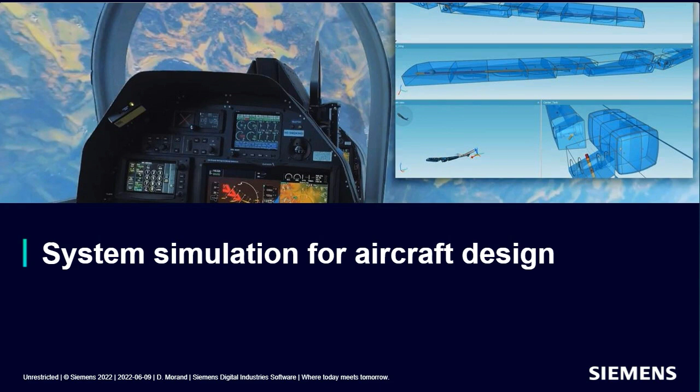Thank you, Caroline, and hello to everyone. It's a pleasure to present you today the use of system simulation for aircraft design. I will go during this 40-45 minutes presentation with Florian through the following agenda. We will look rapidly about the aircraft systems challenge from the aerospace industry, how systems performance

engineering with Simcenter addresses this challenge. We will look at typical applications available with our solutions, and especially we will make a focus, thanks to Florian, on the simulation of fuel system management in relation to severe flight dynamics conditions. I think it's a very interesting subject, and we will conclude these presentations. You can leave us some questions in the Q&A window. We will reply at the end of the presentation to your questions.

Going for industry challenges, like any other industry in the world, sustainability is a key word, and there is a need for any aircraft maker or supplier to actually reduce its CO2 emission consumption to address a better world. We have recently seen that last year a resolution was passed by IATA members to actually have a net zero carbon emission from their operations by 2050. So it's become really mandatory to address the ecological issues when developing new aircraft.

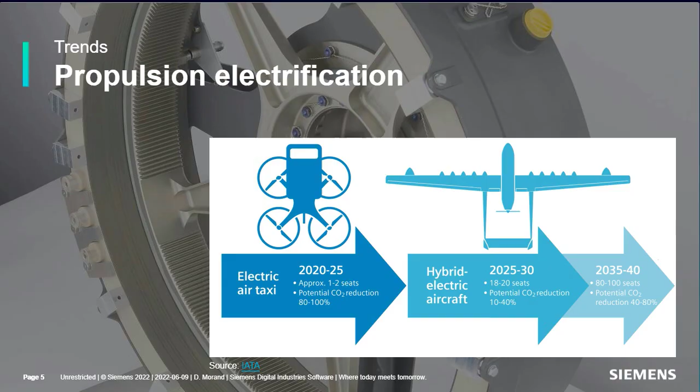We have also recently seen R&D and projects around H2 propulsion, and this leads actually to a complete rethinking of how our concept of aircraft can be developed. At the same time, configuration of aircraft has to be rethought, where various types of wing body can be evaluated, leading to looking at a new distribution of masses and flow elements into the aircraft.

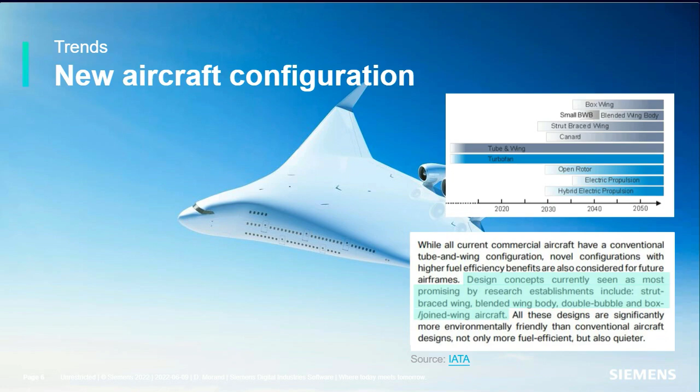So these trends actually affect design from conceptual design, preliminary design, and detailed design all along the process. Engineers have to deal with more complex products. Still, they have to reduce time to market and reduce risk, safety being very important, while actually working more and more in a seamless process and removing barriers between silos, teams, and disciplines. So simulation and engineering work can actually be a part of this challenge in order to enable rapid design to prototype work.

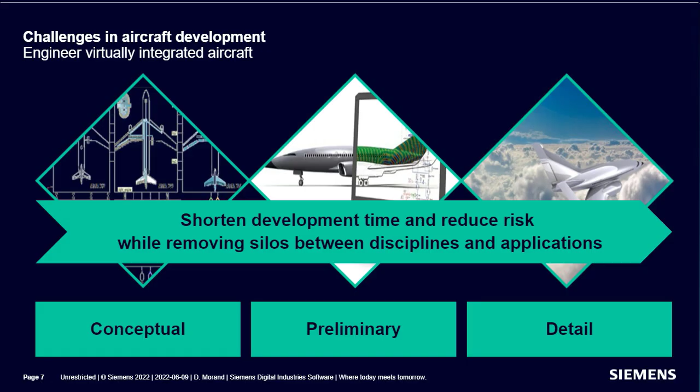If we look at a design process, where simulation can be used and what it means to use simulation all along the design process, from requirement down to launch of product. Actually, it means to work with requirements, to be able to co-simulate various tools, to be able to connect the physical world with the electronic and control world, with software in the loop or hardware in the loop, to be able to use complex models embedded in a virtual representation of an aircraft for verification and validation, in order to use simulation at every step of the process.

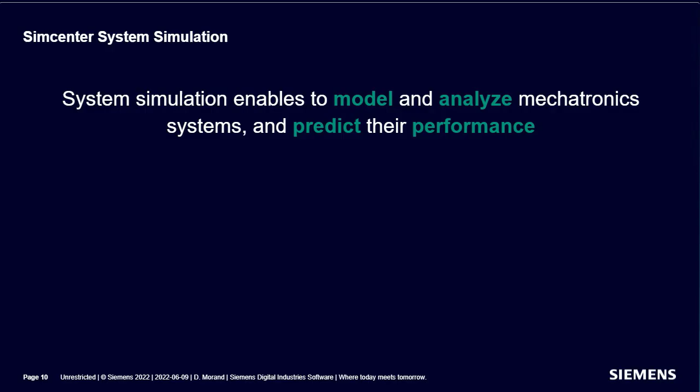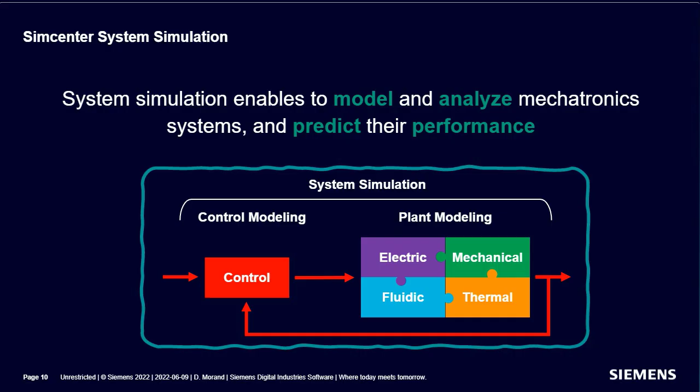I would like to see now how Simcenter system simulation addresses this challenge and how it can be used in such a process. A short recall about system simulation: it is actually a composition of two worlds, control modeling and plant modeling, where we simulate at steady state and dynamic points a complete system, smart systems, in order to predict its performance.

System simulation can be used at various steps of a design cycle, where it can be a first level, sufficient enough modeling level to address the first high level design requirement. It can also be used between high detail level and detailed design models, where usually we use lots of 3D CFD. System simulation can be either on the left side of the design cycle as a boundary condition for such a model, or it can also be a container for component testing and subsystem testing. They can embed results from CFD software or finite element software detailed design inside the model in order to simulate more rapidly a complete system at verification and validation phases.

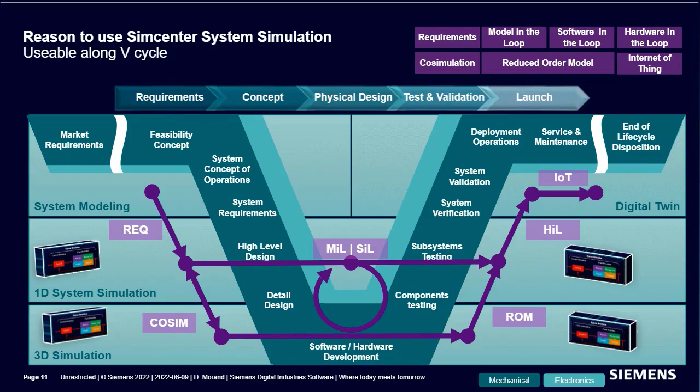So when we use system simulation all along this design, we use our tools, of course, but we also use a kind of methodology. Aerospace industry is one of the leaders of MBSE methodology. So we try with system simulation within Simcenter to have a virtual system integration point of view when we develop a model, with componentization of the elements, where each element can be packed into a component and reused in order to follow a breakdown structure of a complete aircraft and simulate the combination of various systems together, in order to, at pre-design stage, evaluate the behavior, but also at verification stage, evaluate safety procedures, and so on.

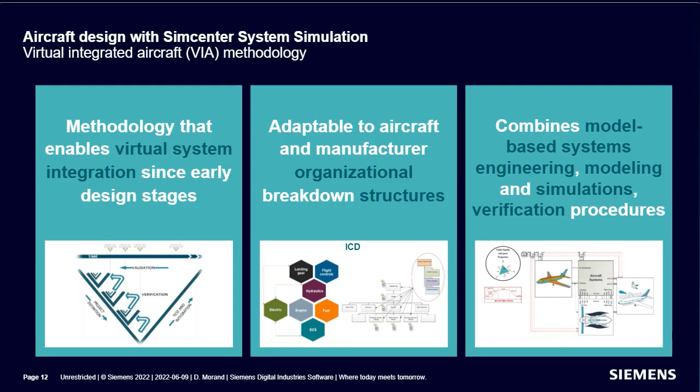I'll switch here. How does this really apply on the supply chain? System simulation can be used by some component makers. For example, if we took the example of a valve and pump builder, they can use this kind of model that reproduces the dynamic behavior of a given pump, which can be integrated virtually into a braking or steering system of a tier 2 supplier, which can itself be integrated into a more complex system of a landing gear, that at the end will be integrated into a virtual model of an aircraft, being able to simulate not only steady state but transient behavior and dangerous maneuvers, for example, of an aircraft. So system simulation, as we are used to in CAD or CAE models, can also be a link and can enable users on various supplier and customer sides to exchange models between each other.

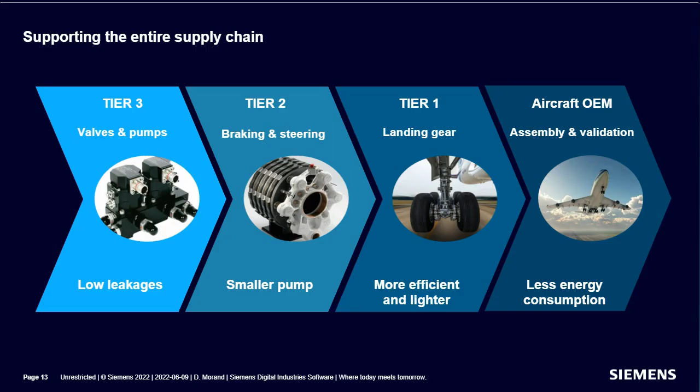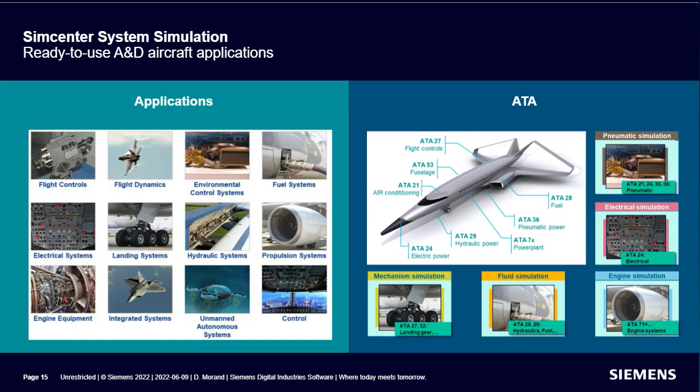Let's look at typical applications and where system simulation is used in the aerospace industry today. The way we organize our tools and solutions is either by application - like fuel system, electrical system, controls or propulsion systems - or we have the capability to group this application or technology elements, which are based mostly on libraries of pre-made components. We can also group them in order to address ATA classification and to create a virtual aircraft model based on this ATA, following a more systemic approach to creating the models.

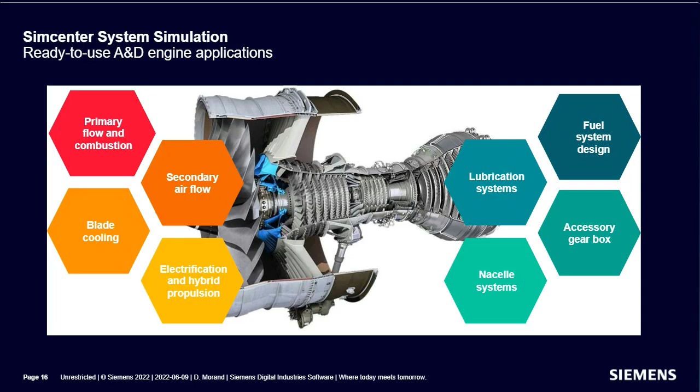As a series of examples, application examples where system simulation can be used, we will browse through five examples: what can be a use of fuel systems, moving toward electrification; how to balance different attributes for environmental control systems design; front loading of full hydraulic systems; and finally, integrated thermal and power management.

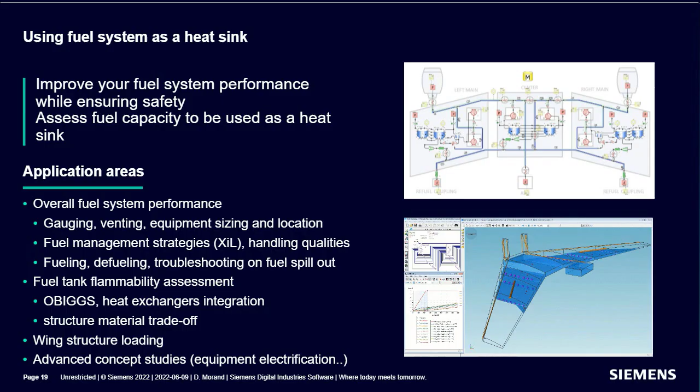In our 1D system simulation, we have the capability to represent the various components - piping systems, reservoir systems and pump systems of a fuel management system - and take into account the connection of this subsystem to the flight dynamics. I will not go into detail on this, because you will see in a few minutes that Florian is addressing this subject with very nice examples.

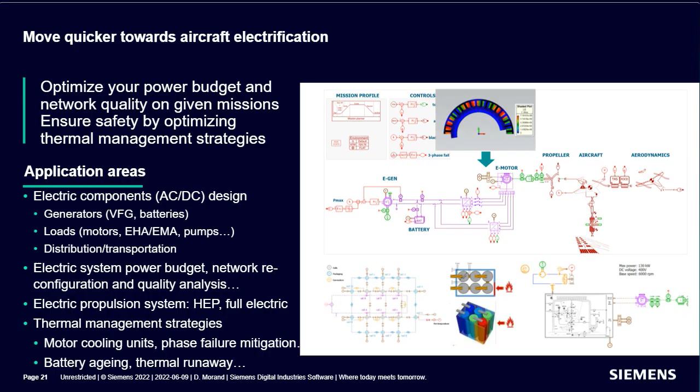We can also use system simulation to be innovative and to validate at early design stages various kinds of new propulsion types. An example here would be the integration of an electric powered mid-range aircraft, or the creation of a thermal management model of the batteries in order to assess not only power demand from the electric system, but also thermal behavior of the electric circuits and electric power machine at steady state, but also transient behavior during a complete flight of the aircraft.

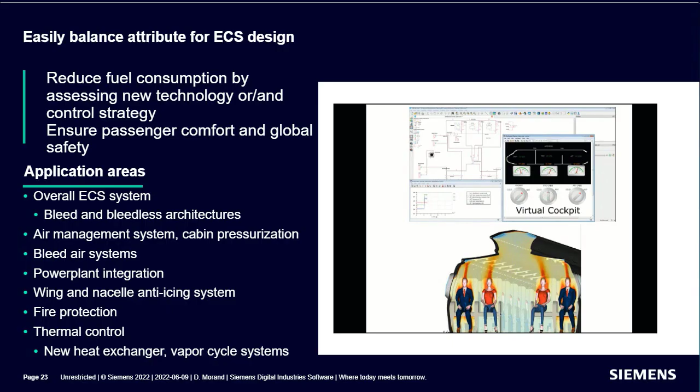Looking at comfort of passengers is sometimes very important. Here we have a nice example of coupling between 1D system simulation and 3D, where the behavior of passengers and cabin airflow can be represented with 3D software. For this example, STAR-CCM+ models are connected to the 1D system simulation software AMESIM, which models the complete ECS systems. Such a model balances power demand for the ECS and comfort demand from the passenger in a single co-simulated model.

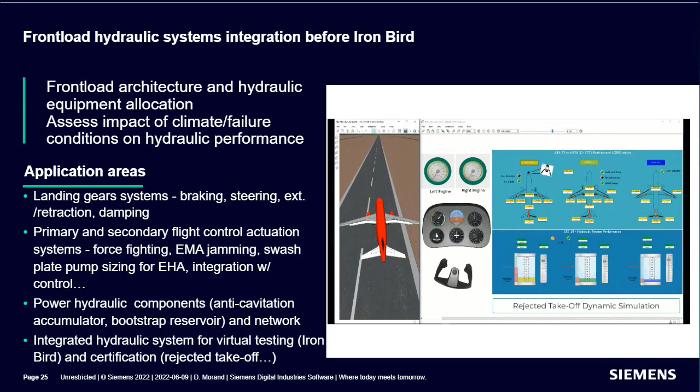As we have seen various applications, the goal of system simulation is not to work on one application at a time, but to couple them together and represent the different systems under a complete aircraft flight mission, simulating either only in system simulation or by coupling with other tools the different reactions of the systems to address various attributes.

To illustrate one of the applications of interest and the coupling between fuel management and flight dynamics, we will showcase a presentation by Florian, who will show you how we simulate an aircraft under severe maneuver.

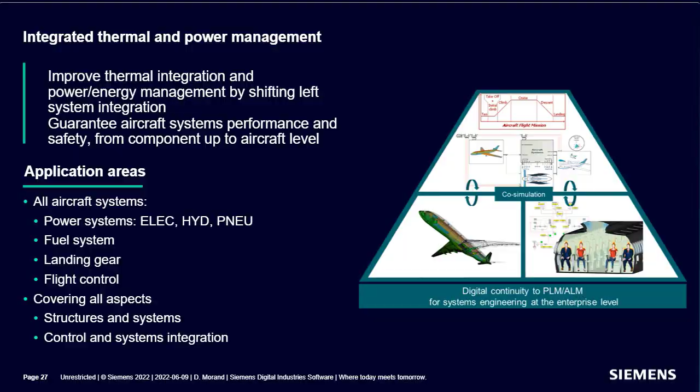Thank you very much, and a warm welcome from my side. My name is Florian Schuessler, I'm the Executive Officer of ACAM Engineering. We are a company focused on simulation engineering based south of Vienna, and together with our customer and partner Diamond Aircraft, we worked on this specific topic: aircraft fuel system simulation, especially for extreme flight conditions. All the insights we gained and how we worked on this project, I want to show and share today with you.

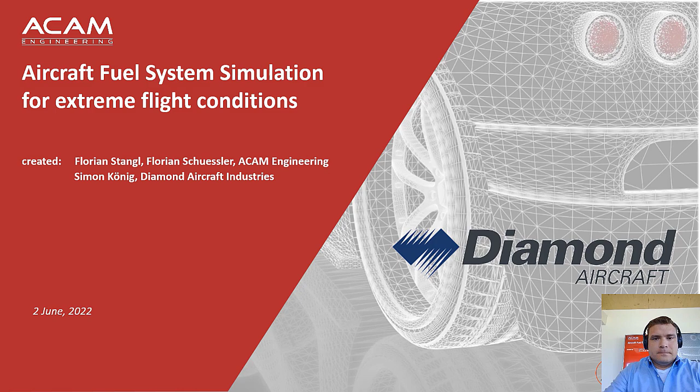A quick look into today's agenda: a quick introduction to ACAM Engineering and Diamond Aircraft, an overview of AMESIM and the fuel system library we use, then how we built the fuel system and what the challenges were, and then the three project topics: refueling optimization, spinning simulation, and an issue with fuel probes in stable inverted flight.

Diamond Aircraft is one of the leading manufacturers of small composite aircraft. They have a very large amount of composites within their airplanes, and they are in the field of general aviation and flight training. For example, big airlines like Lufthansa use the Diamond twin-engine aircraft for pilot training. They also have a special mission aircraft division, and last but not least, they have developed a turboprop trainer named DART.

With this 650 horsepower turboprop airplane, it is possible to train maneuvers instead of on fighter jets, because the hours the airplane is in use are much cheaper than doing all the maneuver training on fighter jets. Within this turboprop trainer development, our fuel system optimization project is embedded.

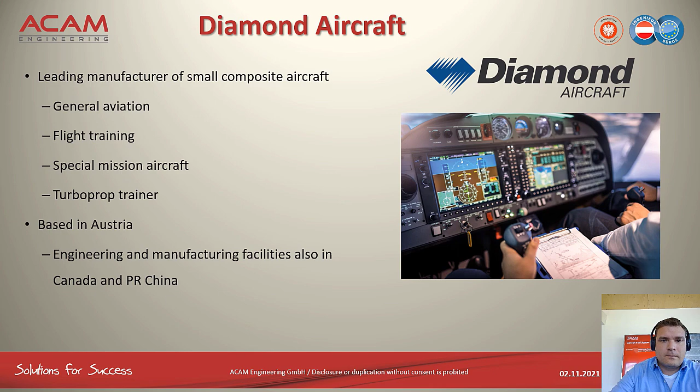Here is a short overview of the Diamond Aircraft product range, starting with the small aero clubs on the left, then different types for flight training, airplanes for private pilots, single engine or twin engine. The biggest one, with 5 seats, is the DA62. The same airframe, a little adapted to one engine, is the DA50, which is also quite new and certified, I think, last year. For special missions, there are also twin engine airplanes adapted with camera holes and different special mission equipment, mostly specified and unique to customer wishes. The last airplane on this list is the Diamond Dart, and this is the airplane we worked on in this project doing the fuel system optimization.

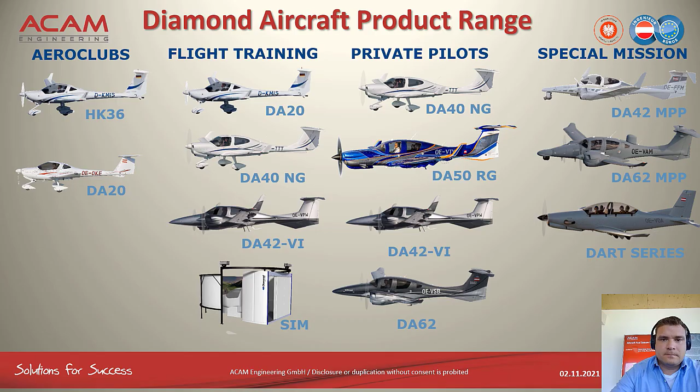Then the last slide of introduction, Acam Engineering. This is my company. We founded the company in 2015. We moved to a new and own engineering location in Lower Austria last year in April, in the middle of the pandemic, which was quite challenging. But now we are very happy, and to this day we have successfully finished more than 150 CAE projects, mainly with Siemens SimCenter products, or nearly all were done with Siemens SimCenter.

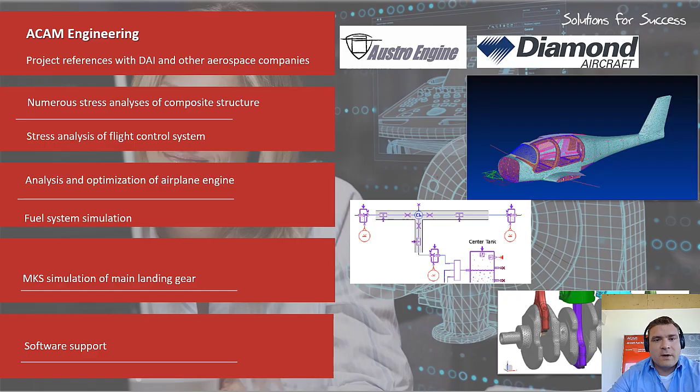We have done the fuel system simulation. We do a lot of stress analysis of composite structures and flight control systems, for example, which one colleague of mine is doing right now. We support the Austro Engine company in the development of their engines, mostly with multi-body domain simulation combined with structural analysis. And what we really like is it's a very embedded work, so we have a good knowledge and know-how transfer in both directions, and we are very happy with this partnership.

The next two points are the overview of the fuel system library and the creation of the fuel system. Okay, as you surely know, AMESIM is based on libraries with different preset blocks, and one of them is the aircraft fuel system library. There are ready-to-use components in there which you can drag and drop in your model and create whole systems out of it.

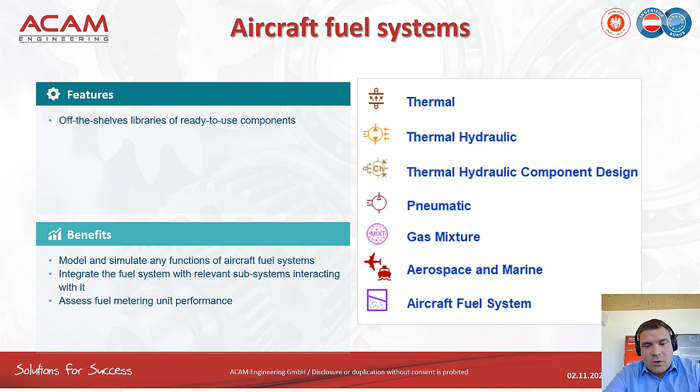And with that, it's possible to simulate any functions of aircraft fuel systems, and also to integrate the fuel system with the relevant subsystems interacting with it. For example: mechanical, fluid, pneumatic, whatever. It depends on the blocks which you are linking other components to, but it's open to different domains within AMESIM.

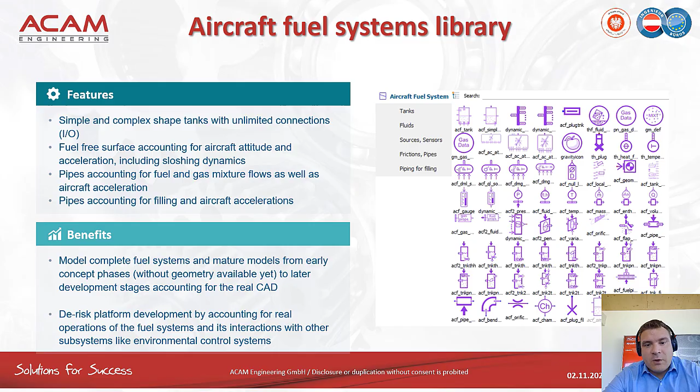And on the right, you can see a screenshot of the available blocks in the fuel system library. There are tanks available with simple or complex shapes. We will discuss later on how to model it. Then there are pipes, there are free fuel surfaces, and also fuel probes. There are blocks for the measurement data you have already gained to run your simulation with measurement data. So it's really a very broad range, but it's also easy to use because it's a drag and drop system, and based on your design plan, you can build your 1D model very easily.

Also, fluids and materials in airplane fuel systems are not quite easy, because it's not water or air flowing through the system. It's, for example, Jet A1. So you need the fluid and material data, and this is also included in the aircraft fuel system library. So you have predefined materials in there, for example Jet A1, which we used also.

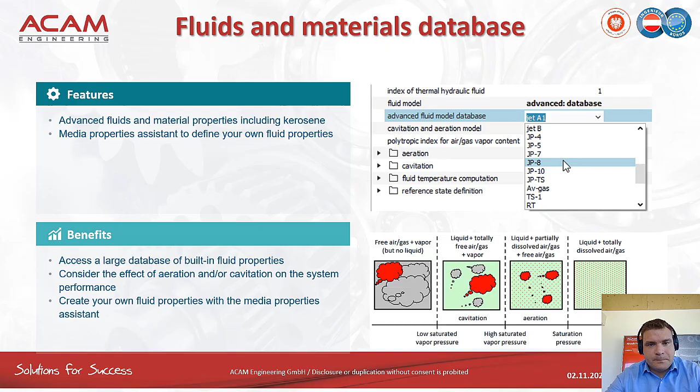One step of building the 1D fuel system is to import your CAD geometry to create the tank shape files. So if you look at a fuel tank, it's not an easy geometry. Mostly it's quite complex because there are freeform surfaces, maybe there are holes in there, and so on. And for that, you need a tool first to create the tank shapes, and afterwards to visualize your geometry and the fuel within those tank shapes.

And the process is to import your CAD geometry as STEP or different exchange formats, and then switch into the fuel system plugin. And in this plugin, you are using the single tanks, creating the tank shapes out of it, which are text files, and then link it in AMESIM to your component. And this is the basis for the analysis of the 1D system.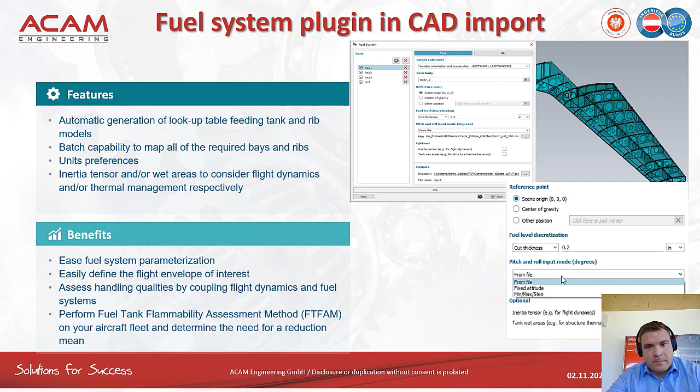And the last step is to visualize your fluids inside the tank, the distribution of the fluids, and how it's moving related to airplane movement. And this is done with the visualization assistant, which makes the fluids within the defined geometry visible.

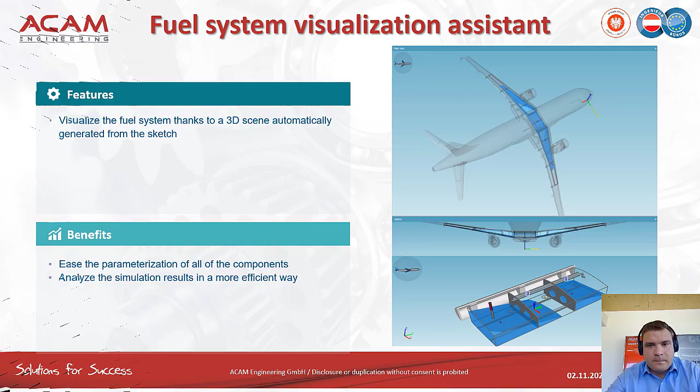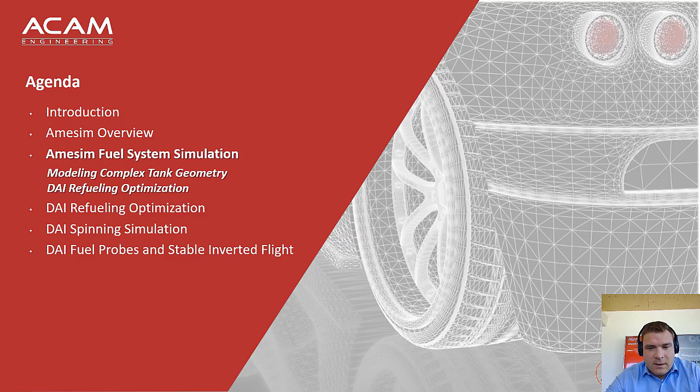Given this information, we can now switch to the modeling of the complex tank geometry, first in the refueling optimization, and how we have done that on these next slides. The constraints for that: the airplane itself features a turboprop engine, aerobatic capability, and it has a wet wing, which means the fuel is completely filled inside the wing.

How is the process to create these tank shapes? First, you need the CAD geometry, which is quite easy because it was provided from the design department. Then you switch into the CAD editor, create the tank shape files and the visualization. The tank shape files are a kind of cut of cutting planes through the single tanks, and the parameters of this cut are written into a text file. This text file, which is called the tank shape file, is used for the analysis of the system. Within that dialog, you also create visualization files, which then help you to visualize the results of the simulation.

On this slide, you see an example of how these files look. On the left, you see what is created. We have a log file of the creation process, the STEP file for the visualization, and the info and the shape file. If you look into the text columns, for example for the shape file, you see the center of gravity and other information which is needed for the AMESIM simulation. On the right side of the slide, you see how an info file looks, and this is additional information which is used to create the tank block inside of AMESIM.

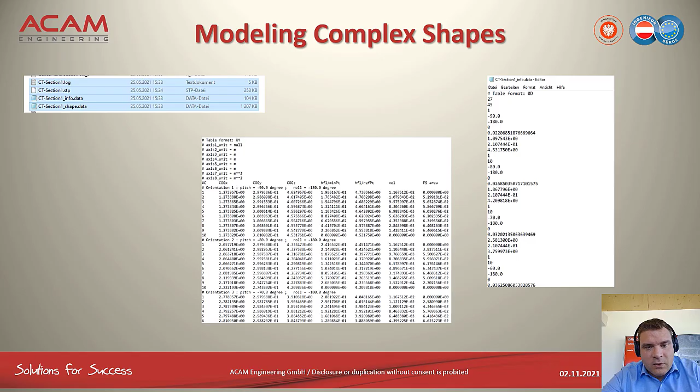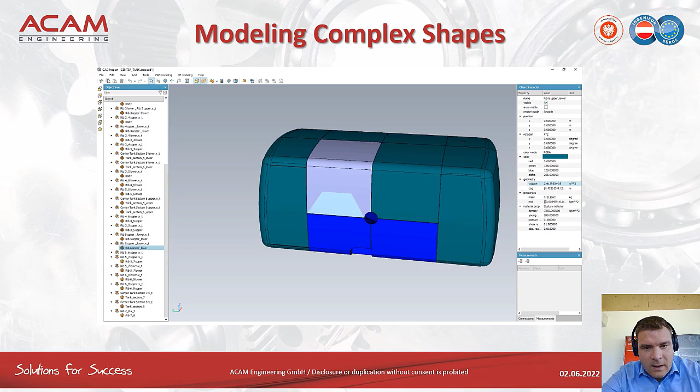How this process looks, you see in this small video. This is the center tank, which is necessary for the aerobatic flight maneuvers to continuously supply the engine with fuel flow. You see on the left some tank sections, some ribs, so it's necessary to define the parts of the tank. We subdivided it into different parts, and this is the assembly in AMESIM. This is the modeling of the center tank, where you can see the different sections. We have section 6, for example, upper and lower, and they are connected to other sections with the ribs. The rib itself also has a shape file, so the holes in there to allow the fluid flow are also designed with those shape files.

So it depends on how many adjoining compartments or sections you have. At least you have one rib to another tank, but it could be up to 6 depending on where your section is located. So this is quite a complex modeling, but it proved very sufficient, and we really created very good and interesting results with that process.

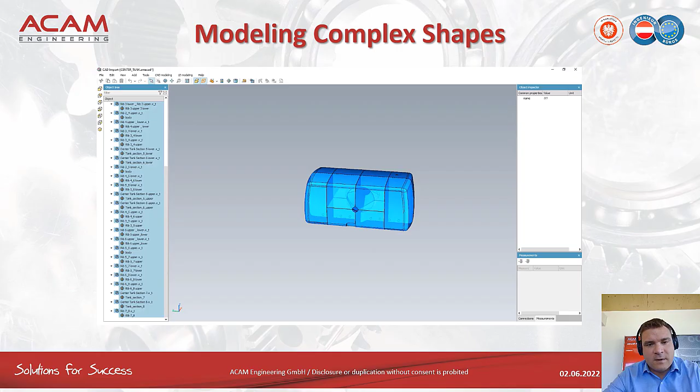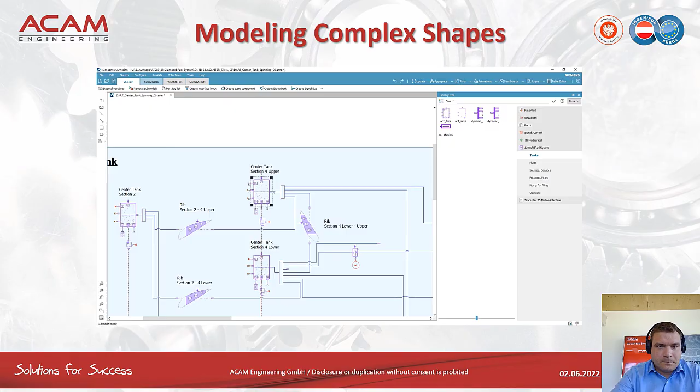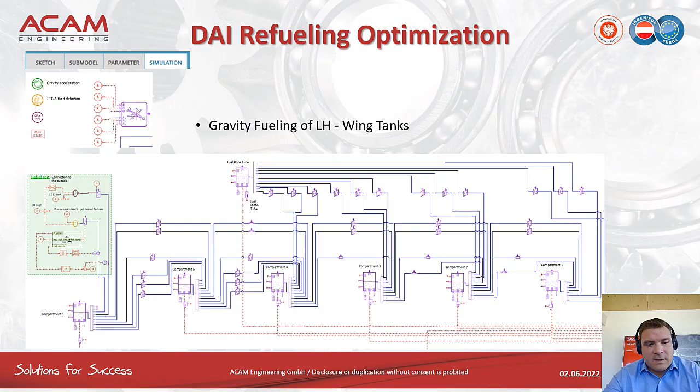This 1D model gave us the opportunity to start with the refueling optimization, which you can see here. Bigger holes in the ribs reduce the fueling and refueling time, but bigger holes are not so good for spinning maneuvers, for example, because then the fluid flow moves faster to other compartments, which is not the best solution. So the initial simulation was the refueling, as you can see here.

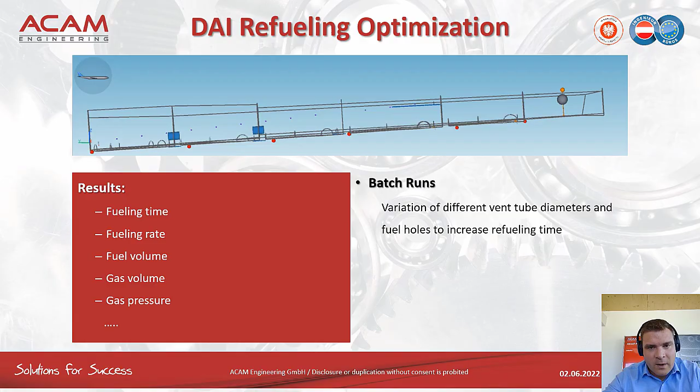The refueling port is at the end of the wing, and you see the fueling time, the fueling rate. In the center here with this point is the fuel probe. So you see when there is movement on the fuel instrument in the cockpit, and it was possible to do batch runs to look into a variation of different vent tube diameters, for example, increasing or decreasing the holes to reduce or increase the refueling time, depending on the aim of your simulation. With these insights, we switched to the spinning simulation.

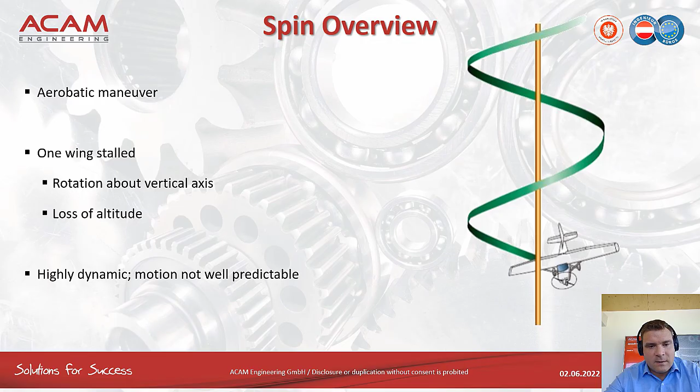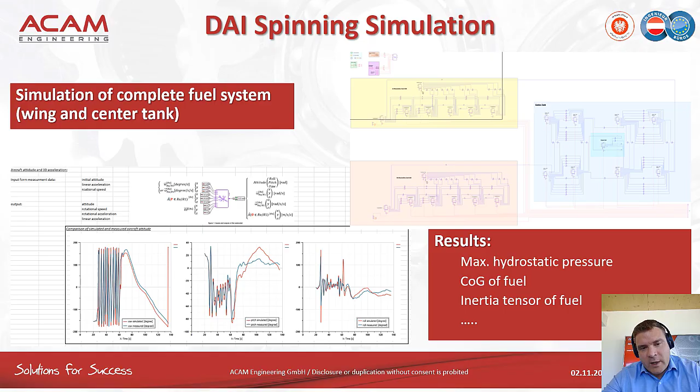You mostly know, I guess, the spinning maneuver itself. So it's an aerobatic maneuver. It's a rotation about the vertical axis, and it creates a loss of altitude. And for the spinning simulation, we did the complete fuel system, the wing and the center tank, all together in one model. And the results which were of interest are the maximum hydrostatic pressure, which is relevant also for structural assessment. Then it was interesting to see the center of gravity of the fuel and the inertia tensor of the fuel. So these were the main results we provided.

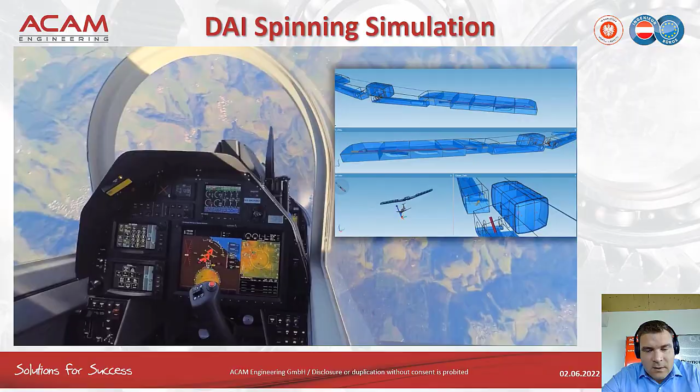Yeah, and we applied the measurement data of the spinning, which you can see in this video, and it's at the same time step, so it's oriented in time to the visualization of the movement of the fuel system you can see here. And if we look into this video, we see how the analysis results compare to the real flight, which is quite impressive. And if you play that in slow motion, for example, you can really get a very deep insight of the behavior in your tanks and in your wing, which, with a look to center of gravity, is also influencing the behavior of the airplane movement.

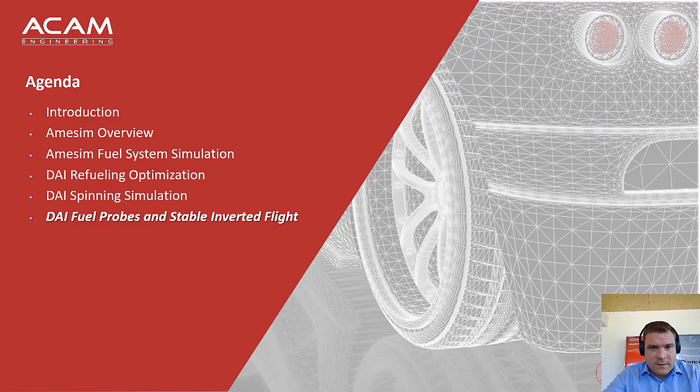Last topic in that presentation is the stable inverted flight and how this is affecting the fuel probe and the display in the cockpit. Fuel probes and stable inverted flight was the task for this simulation. In special, the simulation of different pitch angles with different fuel amounts. In sum, we ran 11 pitch angles with 5 different fuel amounts, resulting in 55 simulation runs.

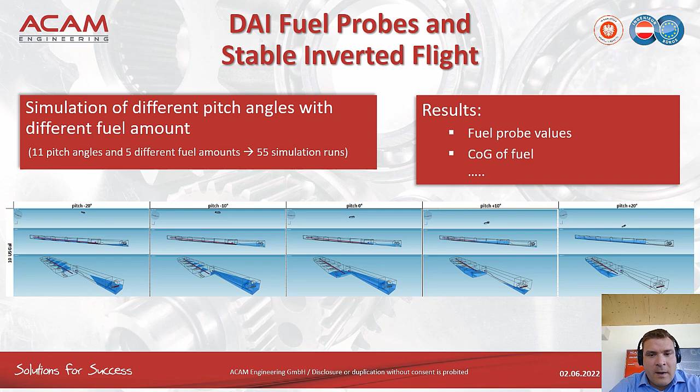And the results, as you can see below, some screenshots out of that, were the fuel probe values and the center of gravity. And the fuel probe values, because they experienced some issues with the fuel display in the cockpit. And so we got some detailed insights of the fluid behavior in correlation with the fuel probe.